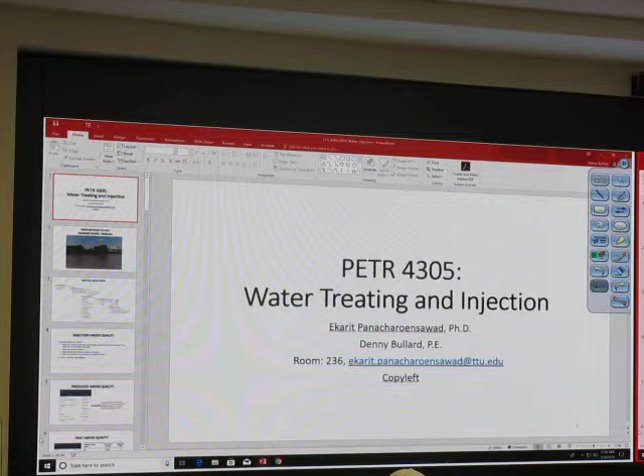Okay, today we want to talk about water. I think people say that if you're in the oil business, really you're in the water business. For a long time in the oil field, all we did was talk about water as a waste stream, how to get rid of it. So more and more today there's social pressure, it's called your license to operate. How we handle that water, how we preserve the water is a big part of our business.

And everybody just takes this for granted that it's there to drink. We're really in competition in the oil field with agriculture, with cities and municipalities for the use of this fresh water. So we want to look at a couple things. One will be how do we reuse it, recycle it, or retreat it for either drilling or fracturing purposes, or what do we have to do to treat it for use in water injection. When we talk about water injection, that will be either disposal or for water flooding.

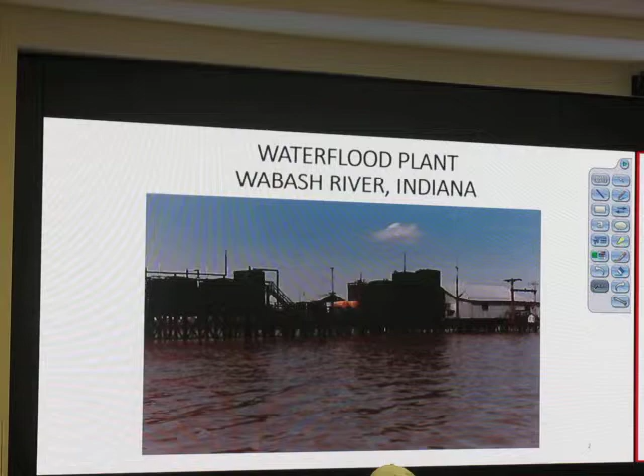So water flooding literally can happen. This is an oil field on the Wabash River in Indiana. Normally you can drive to the wells. In the spring when the floods hit, snow melts, all of the facilities are on 8-foot platforms. To get above, you have to take a boat to get to the facility and to each individual well. Each pump jack is set up 8 feet too. So we're not quite that literal on water flooding.

Really, to think about water, you need to think about the whole life cycle of it. Where do we take it from the water source to a gathering system, to an injection plant, a distribution system, and finally to the wells. We're going to talk some about well work today as part of this facility to handle water.

Water sources have to consider the compatibility of different waters with each other. We also have to look at the volume. Is it sufficient for the needs that we have, or is the volume such that we're going to have to think of other disposal methods.

This may sound kind of silly, but water runs downhill. If you have to place a water central gathering system, you'd like to be able to use gravity as much as you can to help you get it there. Study about pumps - if you don't have to put that pump in, just let gravity take it down to the point where you want it.

Produced water across lease lines is a bigger and bigger issue that we'll have to face. Your lease normally gives you the right to lay water lines anywhere you want on your lease.

Once you get off that lease line, you've got to secure a right of way to take that water any further, or that unit line if the property is unitized. One of the big bills in the legislature right now is the right of eminent domain. A lot of pipeline companies and even producers have used that, say it's for the public good: I can cross over lines and I can do it with governmental aid, I don't have to have the landowner's permission. So that's a very sensitive issue with the landowners that we'll be working with.

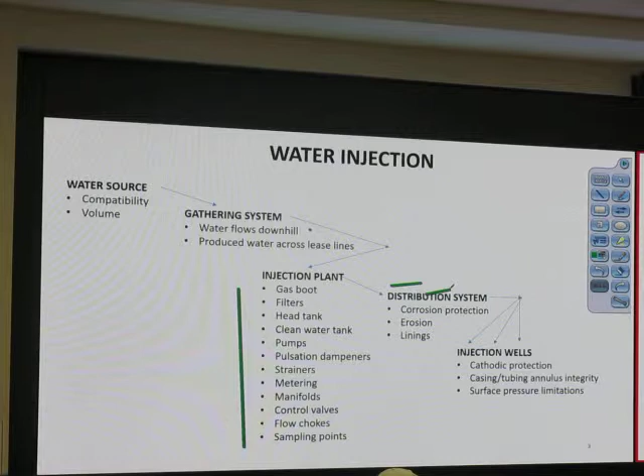But first, for injection water quality, anytime we go in the ground with it, quality injection water can be defined this way. It doesn't contain particles large enough to cause any formation damage or plugging. And those particles can be solids, oil, and gas. Those can be considered damaging particles for a waterflood. Our quality water doesn't cause corrosion. Now, there's not a lot of things we can do to water. We can add chemicals to it. Most especially, though, we can consider the trim, the metallurgy, and the linings and coatings that can go into it to keep corrosion from happening.

The water that we use would be quality if it doesn't create a scale or other precipitate. With mixed waters, that's always a danger, taking it from different sources. We don't want any bacteria that can cause corrosion. Bacteria have a way of lying in low spots on pipelines. So if we don't keep that water moving fast enough and get deposits in there, that's a prime breeding spot for bacteria. Their byproducts are corrosive. And finally, it's got to be affordable. If I can't afford it on a per dollar basis to make money out of the project, it doesn't do me any good.

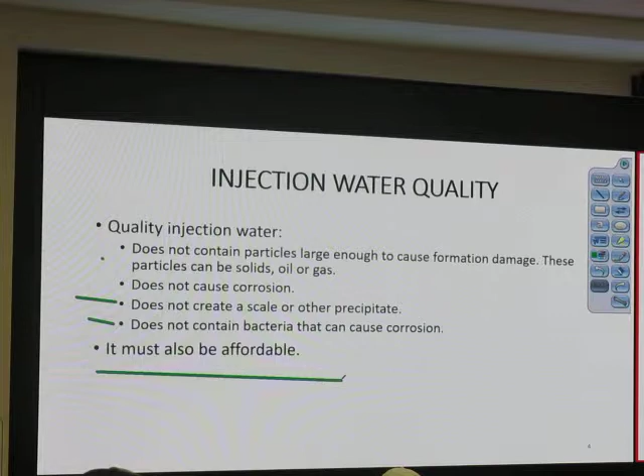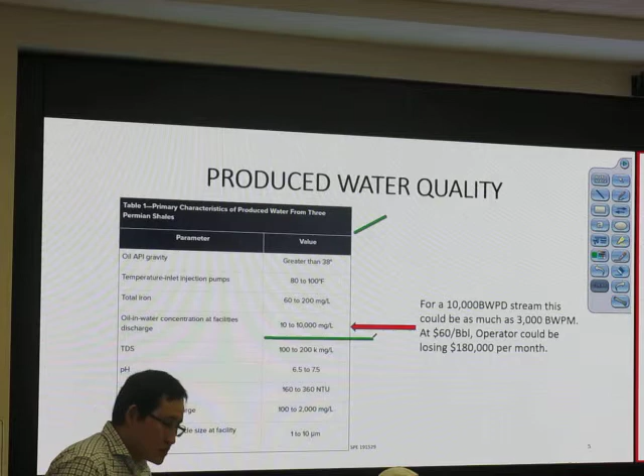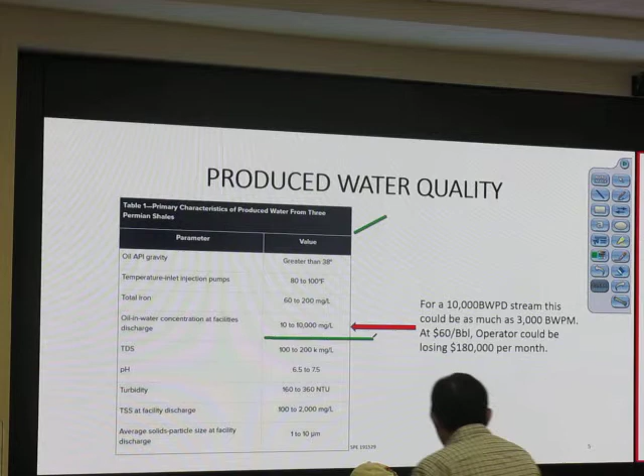This table was taken out of an SPE paper. It's primary characteristics of produced water from 3 Permian shales, and there's some general guidelines there. I want you to look, though, at this one. This is the oil in water concentration in facilities discharge. They built a facility, they're getting rid of the water. Notice it went from 10 to 10,000 milligrams per liter. A quick calculation: for a 10,000 barrels a day water stream, that's as much as 3,000 barrels of oil per month. At $60 a barrel, in a month's time, we'd recover $180,000 of oil that's in the waste stream.

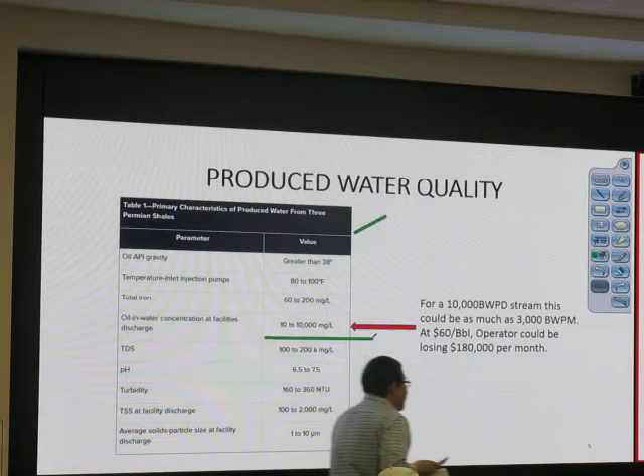Now, if I'm running a saltwater disposal station and you want to deliver 10,000 barrels a day of water to me with 10,000 parts per million oil in it, bring it on. I'm going to charge you $2 to take your water, but I'm really going to make money on that oil I skim. And the Railroad Commission recognizes it. They have a special report that you turn in, skim oil recovered from water stations. So if you don't design the equipment properly, you could be giving away money, disposing of it in the ground. And you can also be damaging your wells.

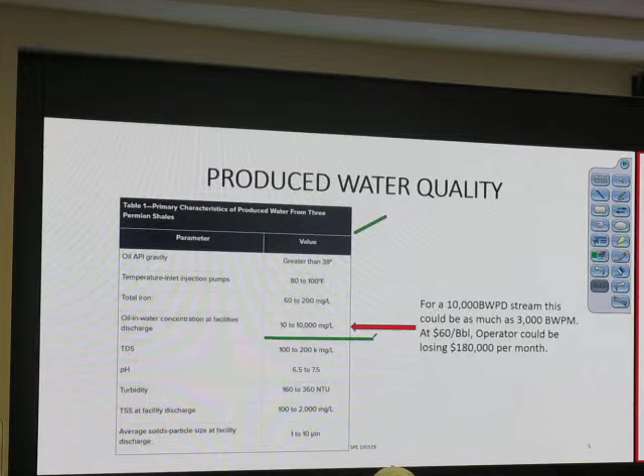Frack water quality. Here's again our Permian typical quality. Notice what the difference is when we go to look at making frack water with a cross-linked gel fluid as compared to slick water. Cross-linked gels have got to have all of these products or electrolytes, whatever you want to call them, in certain concentrations for the gel to work. If it's out of those boundaries, the gel doesn't work.

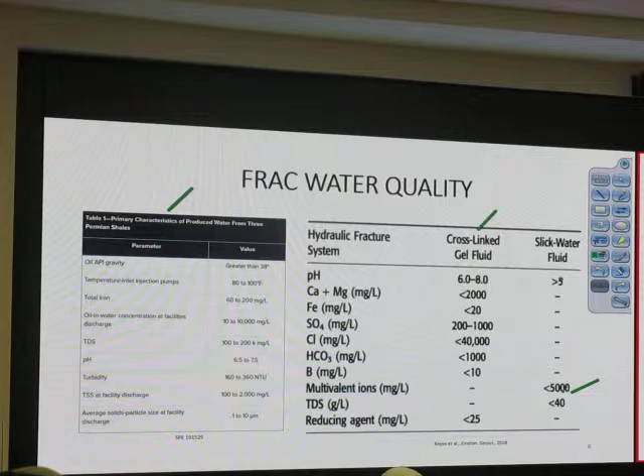So if I'm taking produced water and taking it from this to this quality, I've got a lot of treating to do. Slick water, on the other hand, we just need to make sure our pH is all right. There are basically a lot of chlorides in it, and our TDS is relatively low. Most of the time, we can get that with filtration. And that's what makes slick water such an attractive part of a frack job, the ease that we can take produced water and get it down to a frack water quality. I was going to ask what TDS is. Total dissolved solids, as opposed to suspended solids. Okay?

We're considering multiple water sources nowadays too. This was one major operator's pipeline system that was being laid in the Permian Basin. They're taking, in effect, produced water. They're taking water from brackish sources, shallow sands that are too salty to be considered fresh. Taking water from city effluent plants. And then they're taking water from freshwater, USDW. Everybody know what that is? Anybody know what that is? Underground source of drinking water aquifer. And so it's one of those designated as a freshwater source of supply.

What happens when we mix all those waters together? You stand a chance of forming scale. You can form precipitates other than scale that could be in there. And so all of those different sources of water are being combined together to supply frack water and drilling water for oil field purposes. And we'll talk some more about these systems and how they're put together in a little bit too.

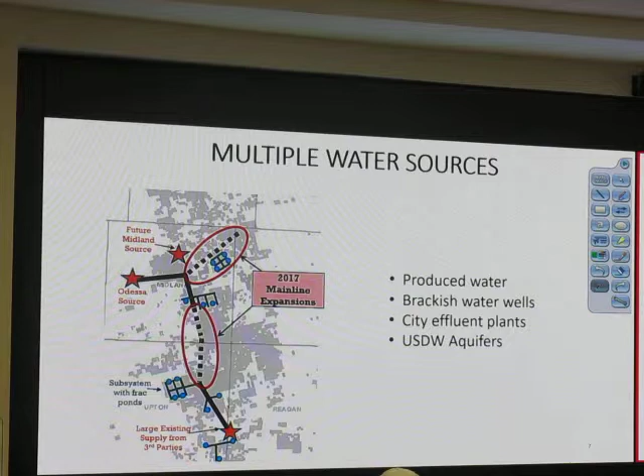Does anybody remember what a Stiff diagram is? Did you cover this in fluids? Never seen it before. Okay. A stiff diagram is an easy way to recognize what your water looks like graphically. What you have in the middle is a dividing line; to the left are positive ions, to the right are the negative ions. So for example, on the right side here we've got chlorides, bicarbonates, sulfates, CO3s. Then on the left we've got sodium, calcium, magnesium, iron. Most of those components will be present in most waters. And so if we look at seawater, this one right up here, and the chlorides are right here, that thing really swings heavy on chlorides.

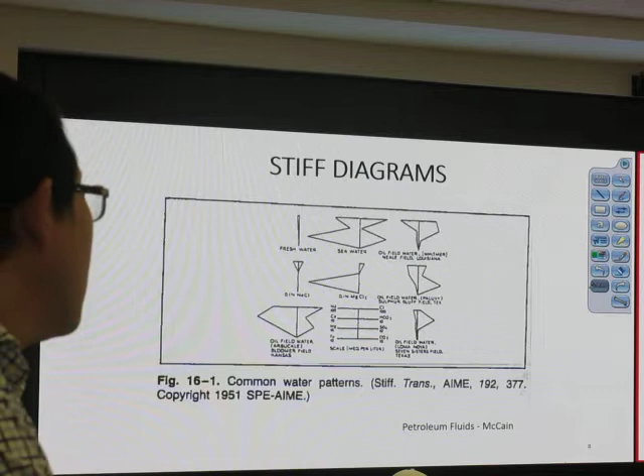And then each produced water has a unique signature. So with these diagrams, you just make a quick plot of the ions that are in it, and if you're looking at a water sample and I say, I wonder if this is coming from a certain reservoir, I can make that signature plot, lay it down and compare it. You know, fresh water would have hardly anything in it there. But the others have unique signatures to them. So if I'm looking at water compatibility, water with the same ion concentrations ought to be compatible, and that's a quick check with some information you can get pretty readily. Also, if you're looking for a casing leak, take a water sample, make a stiff diagram. Does the water look like fresh water, or does it look like my produced water? Gives you a hint where things are when you go to troubleshoot.

Water treating technologies. You get out there, you're going to work for an operator. There are going to be people knocking on your door saying, I can treat your water, and I can take it down to drinking water quality. I can treat it to whatever specification you want. And that's probably true. Remember, every water doesn't have to be cleaned up to drinking water standards. You can spend a lot of money going to drinking water quality for no good reason.

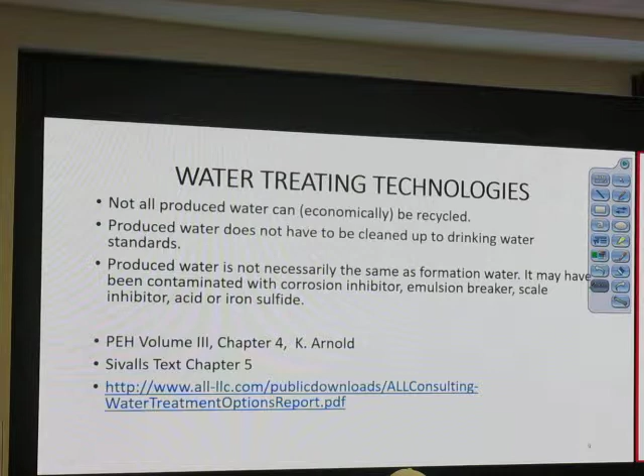And then produced water, you think, well, I don't have to treat it. It's produced water. It's come out of the formation. I'm just going to inject it right back in, right? Well, it's got some contamination too that it's seen with corrosion inhibitor, emulsion breaker, scale inhibitor. You could have had iron sulfides form. All of those things need to be taken out before we put it back in. Or at least we take out enough based on tests that we're not doing anything harmful to the formation when we re-inject produced water. So just because it came out of there doesn't mean it can go back without any treatment.

There's 15 or 20 different technologies out there that different people are attempting to use to treat produced water. The chemical engineering department has got a test going on using membranes, pressure-driven membranes. When we go on the field trip to Oxy, we're going to see membranes where they're separating CO2 from natural gas. And this principle applies to produced water to take out different elements, just like the gases can be separated on a membrane.

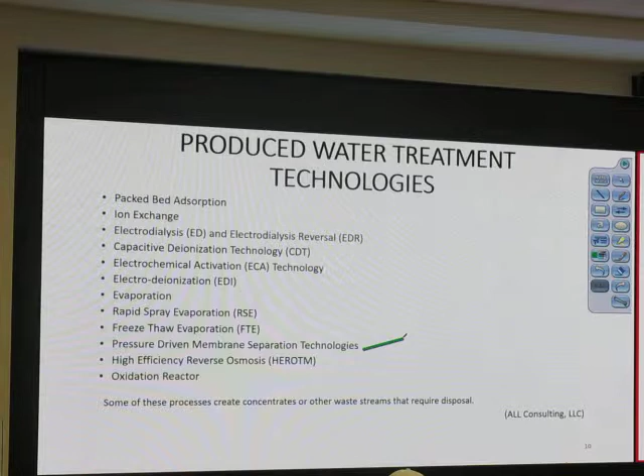The names are 18 syllables long, the different things that people will try and do. So just remember that some of them really work, some of them are really expensive. You don't need to familiarize yourself with every one of them, but ask some deep questions about what does this technology do, what's it going to cost, what's the drawbacks and limitations to it.

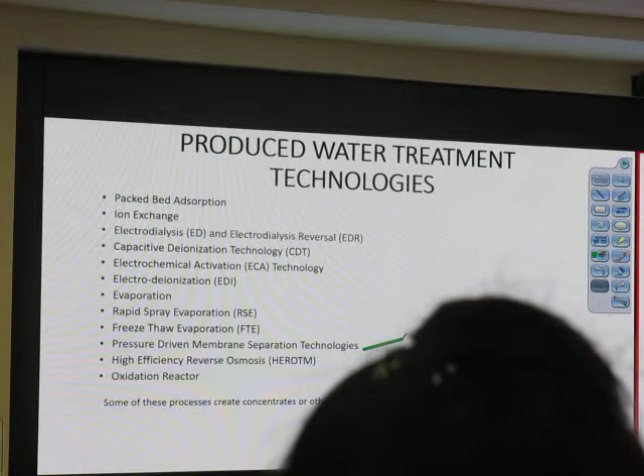System design pressure. How do we know what pressure we're going to need when we go to inject water? What's the maximum pressure? Fracture pressure? Why do you say that? Do what? Oh, yeah, a step rate test will tell you what that pressure is. Do we want to be able to fracture the reservoir? So we say that as a good reservoir engineer, I don't want to fracture the reservoir, right?

How about south of Laredo? It was a freak cold winter in about 1983, and the lines were all laid on the surface. Nothing was insulated. We'd just been testing some new pipe that just popped together. It didn't have screwed threads; it was literally one joint forced in the next one. And when this cold weather hit and stayed for a few days, the ice expanded and the pipe contracted, and we had 30-foot joints laying all over the pastures. Big water leaks, but we designed on the average South Texas conditions. So averages can get you in trouble.

And I guess it's not nice to talk about Aggies, but they talk about the Aggie down at College Station that had one foot in the bucket of ice water and the other foot in the bucket of boiling water. On average, he was comfortable.

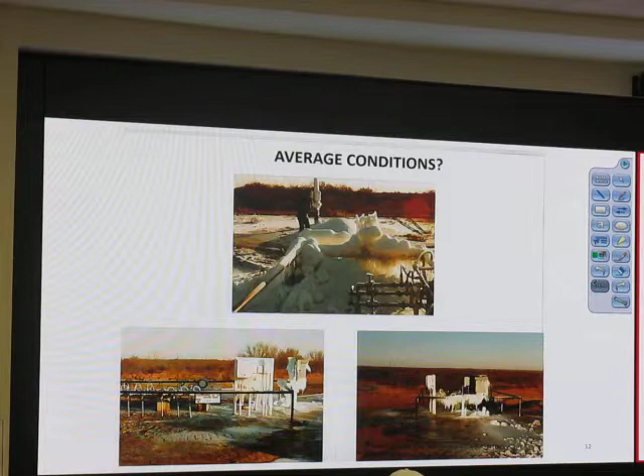So we need to know what we're designing for. What kind of conditions might we expect? System design pressure. Here's an example of things we work through. If we have a well at 5,000 feet, we know the fracture gradient, we know the specific gravity of the injection water, it's a little heavier than fresh. And then we've got to make a starting point on what I want to get to the wellhead with, and we can assume 10% of our average pump discharge pressure will be taken up with friction pressure.

You guys are learning all sorts of ways to calculate pressure drop in the line, single phase. Dealing with water is nice. So what's our pump discharge pressure? First, we've got to calculate the parting pressure. That's just the frac gradient times the depth. We get the benefit of the hydrostatic head, which is just the gravity of the water times the depth times the gradient. Then if we subtract that hydrostatic help and give ourselves a 10% safety factor for this particular condition, all we have to have for pump discharge is 1,045 psi.

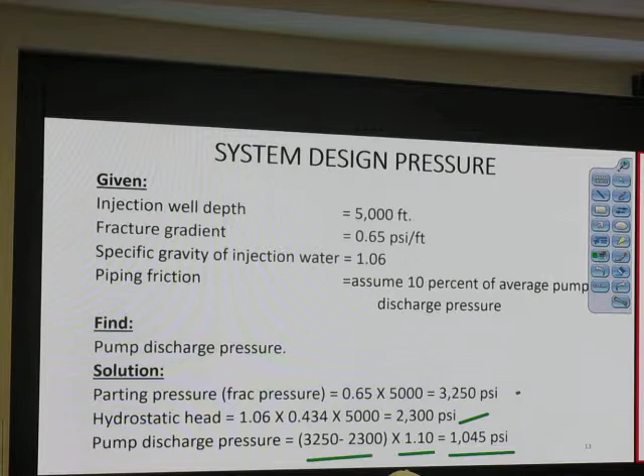And we can get to our wellhead with pressure great enough to fracture the formation. Then we go back and refine this as you design your piping, put those numbers in there and see what you've got to do to really get there. An injection station design is pretty much the same if we're doing a water flood station or a disposal station.

This would be a typical water flood station layout. We're going to bring our produced fluids from our tank battery, produced water, through a gas boot. Even though it's water, there will still be some gas entrained in the water generally. Coming into our gas boot, we go into a large produced water tank. And then from the produced water tank, we're going to skim out of it and go to a skim tank for oil.

The skim tank can be pumped back to our heater treater. We can resell it. Remember, this is where we're trying to get water down to a quality where we're not giving it away, or we're not plugging a formation. Go out of the produced water tank to a pump. Almost always in a water flood installation, you'll see filters. Filtering removes most of the solids out of the produced streams that will need to go into injection wells. And it's always a good idea to have two of those because filters will plug.

Anybody ever had a swimming pool system they worked on that had filters? What do you have to do to it to keep it working? You have to backwash it. And so if I have the piping such that I can isolate one, backwash the other one, I can stay in business 100% of the time while I'm cycling back and forth between backwash and filtration needs.

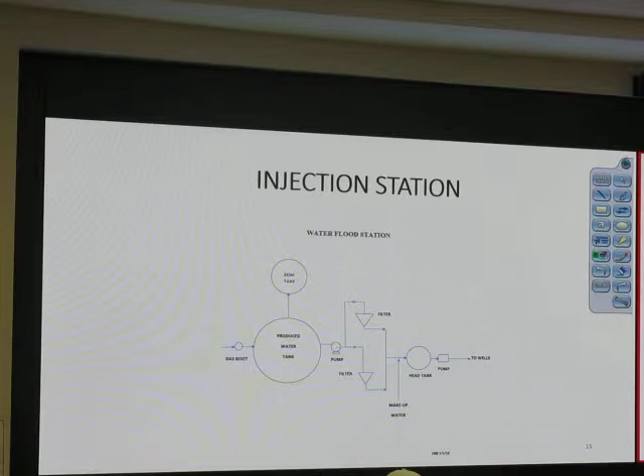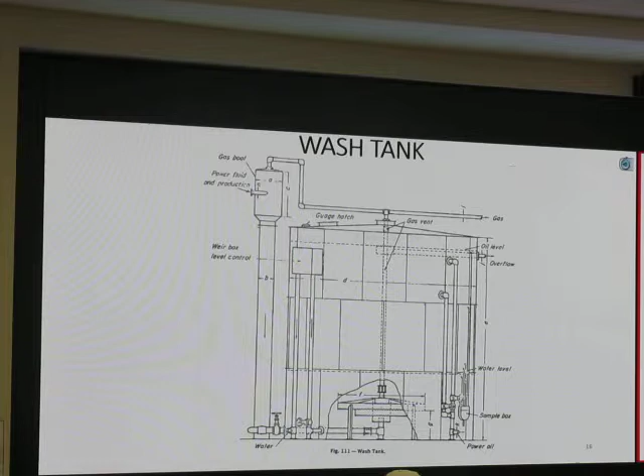This is a wash tank, which is pretty close to a gun barrel. The only difference, this one is taken from a design for cleaning power oil systems. Remember when we talked about artificial lift and subsurface hydraulic systems? This is the same tank design that would make a very effective water treating tank. Bringing the produced fluid in to a gas boot. This has about a 0.5 foot per second velocity through it. Lets the gas separate, go to the line.

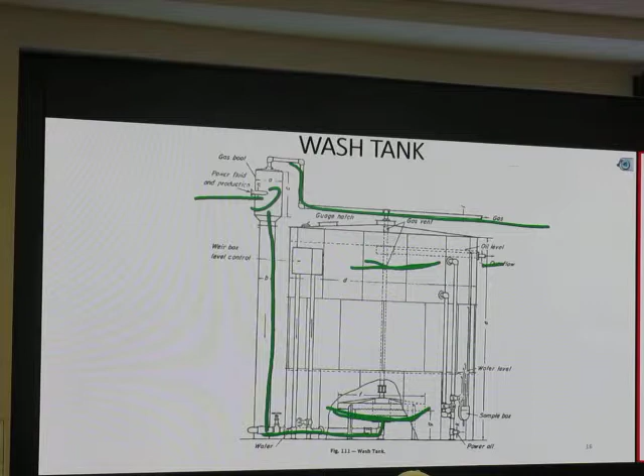Water that's dead now goes in the bottom of the tank and comes up and goes under these spreaders. That distributes the water volume out through the full diameter of the tank. And as this rises, there'd be another skimmer on top of here to take this overflow, and that would be our oil going out to our skim tank. Cone bottom tanks really ought to be considered for those produced water tanks. You're going to be seeing more solids come in there, and that makes for a lot easier cleaning.

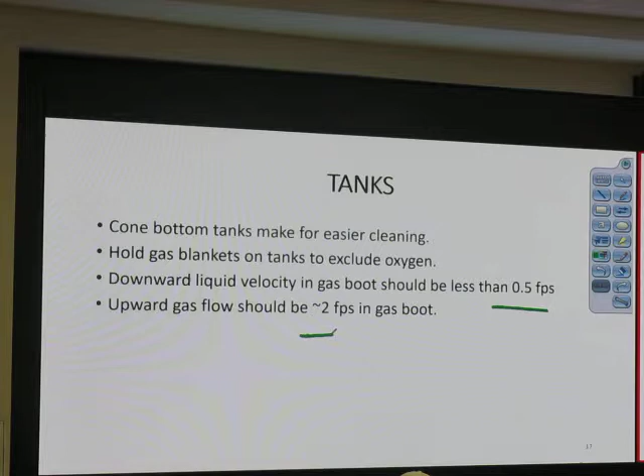Tanks need to have a gas blanket on them for oxygen control. This 0.5 feet per second is a rule of thumb. Engineers can get in trouble using rules of thumb. They can also, they'll get you in the ballpark for design. And then you can do further refining with a lot of the techniques that you're learning in here. And then we want that upward gas flow to be about 2 feet per second. Higher than that, we're going to start carrying some water.

Media filters are the most common type in the oil field, and that's just a sand filter. It may have some carbon in it. So that can include sand and gravel or graphite. You're going to have to usually pump through those filters. The head tank won't be sufficient to get it all the way through. You're going to have to pump through the filter, and you're going to have that same pump. You can turn it around and backwash with it.

Sivalls has some design literature that's in your text that you've already been given. And they use a nominal design rate of about 2.5 gallons a minute per square foot of filter area. You wind up with some very large filters on big water flood stations. And to that point, you might be surprised, but not all engineers think alike.

The classic example I saw of this was a large company was selling some properties. The company I worked for was going out to buy them. We were doing our due diligence on the ground, going and looking at all the equipment.

We found a large building. The company took us in there, and it was a brand new filter. That thing was probably 12 feet in diameter, stood about 15 foot tall. It had all the piping up to it. It was brand new, had never been used.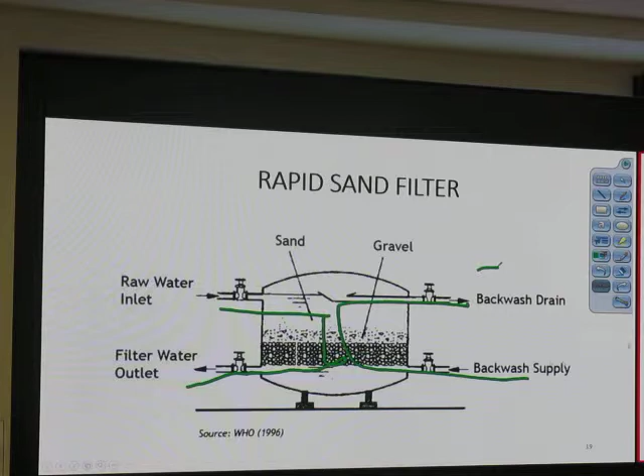This is from the civils literature on sizing. A quick sizing on that will give you an approximate idea of how much capacity you need.

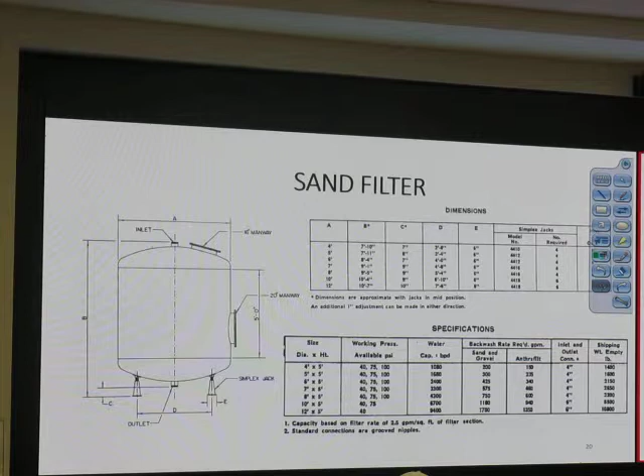Injection pumps: pumps can be positive displacement or centrifugal. We had a couple of lectures on that. Remember, the two big things to consider when we buy a pump are our capital cost and our operating expense. Which one of these types of pumps, PD or centrifugal, for the same water volume would cost the most to operate?

Everybody thinks a PD pump would be the most economical. Most economical, or which one costs the most to operate? Is there a difference? You said which one is most economical and which one costs the most. I'm asking you, is there a difference? Yes. Okay, why is that? The one that costs the most to operate is the least economical. Okay, good point.

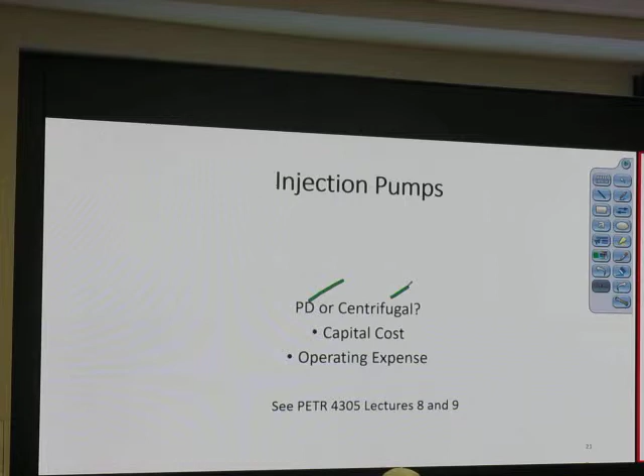The cost will be different between the two types of pumps. On operation, which one's more efficient, PD or centrifugal? PD. So if we have a PD pump like these, how many potential leak points are on a PD pump? This is a big quintuplex, used on frac trucks. This is a triplex, 3 plungers instead of 5. How many leak points are there? A lot, right? How many leak points are on a centrifugal pump?

Probably where the inlet and outlet piping connect. How many parts do you have to replace on a PD pump compared to a centrifugal? These are made for easy access. Notice all the bolt caps on top of the cylinders here to get to the suction and discharge valves. The plungers will take wear and tear. We've got a lubricated crankcase back here that has bearings in it that have to be maintained.

A centrifugal has some of those same bearings and considerations in it, but a PD pump is generally used a lot more than centrifugals in the water floods, especially in West Texas, because of the pressure requirement. Lower pressure, high volume lends itself to a centrifugal pump. The higher we go up on the pressure, the PD becomes the pump of choice.

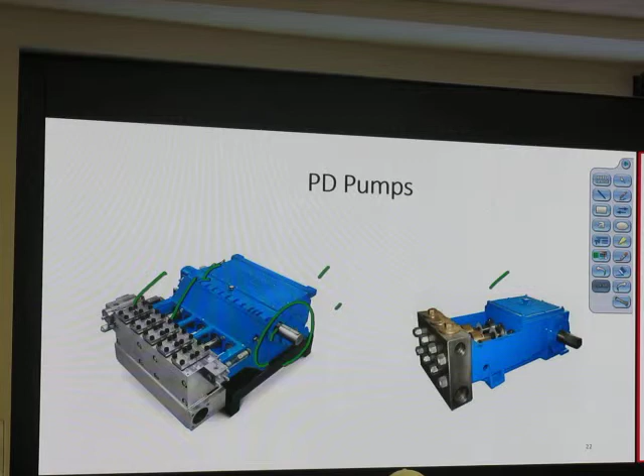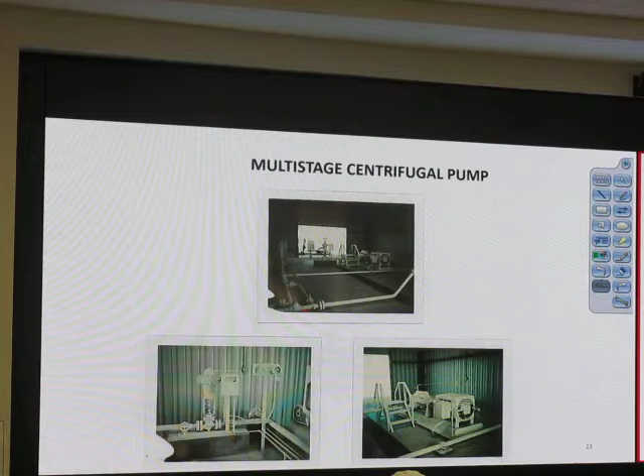This is the motor sitting back here with the pump. Coming into the pump is a suction line from the tank that sits just outside the building, goes into the pump. From the pump, back to this picture, it goes through a startup valve. That startup valve, when the pump starts, is closed.

Why do we want to do that? Back pressure on the pump. And why does it start up there? That's what he said. Where'd he go? Why do we start against the closed valve?

Look back at a pump curve on a centrifugal pump. If there's no back pressure, where does the horsepower go? It goes up, it's just infinite. So if we started against a closed valve, we don't overrange our motor.

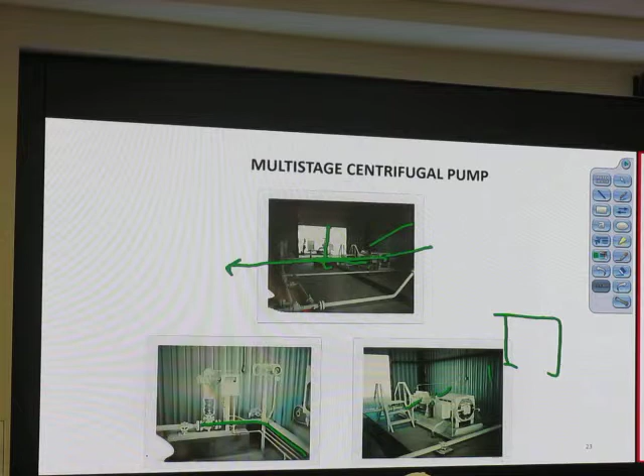We could start up against a closed valve. As pressure builds up, this valve starts to open and release pressure to the system. So then our water can go out to our headers for injection, or in this case, we've got a bypass where we can recirculate water back to the tank, helping adjust our total volume coming out of our station. Schematically, it looks something like this.

We come out of the pump into that first control valve that's going to hold the back pressure. And then once it opens, we go on out to our headers, and then we've got this recycle line that takes it back to the tank.

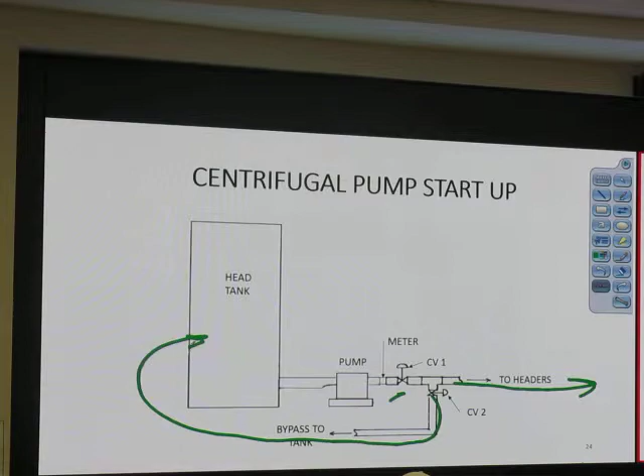PD pumps take big bases under them to be really vibration free. Most of the vibration problems we see in pumps are due to poor suction conditions. It's got to be big piping, short piping runs, slow velocity to get into that pump. The metallurgy has to be selected to be corrosion resistant, and aluminum bronze is a real common oil field solution for these corrosion conditions.

So when we're selecting the pump, we're taking that total capital cost plus operating expense over the life.

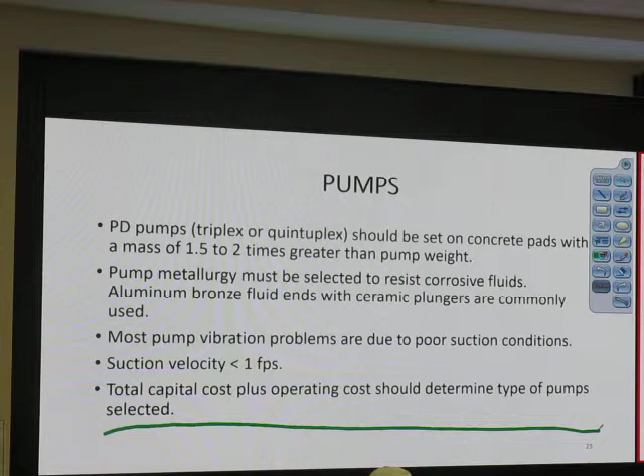Distribution lines. How long can a distribution line be? As long as you want to pay for the horsepower here, you can get any volume and pressure you want out to any header and to any given well. So sizing these lines, and I get this question a lot about senior design, is how long can they be? What's reasonable for a line?

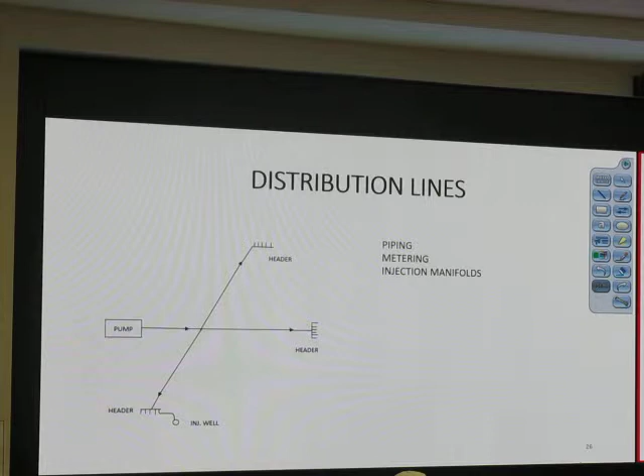So it's a matter of what you get as an economic solution, right? I pay for horsepower here, I pay for pipe size here to help reduce horsepower. And so if I can reduce horsepower enough, I'm putting in large lines. Generally though, we're staying with line pipes that are easier to handle, smaller diameters.

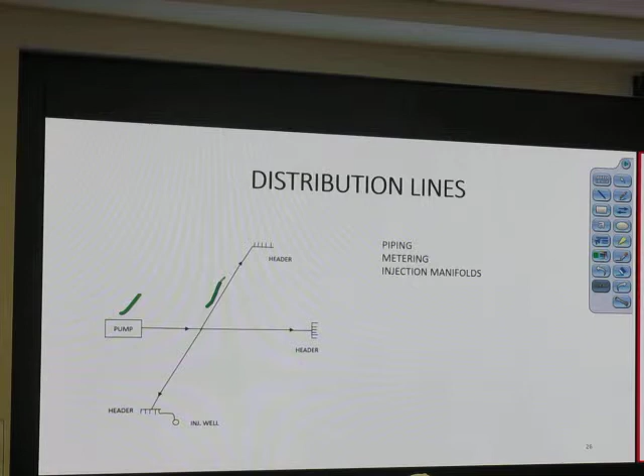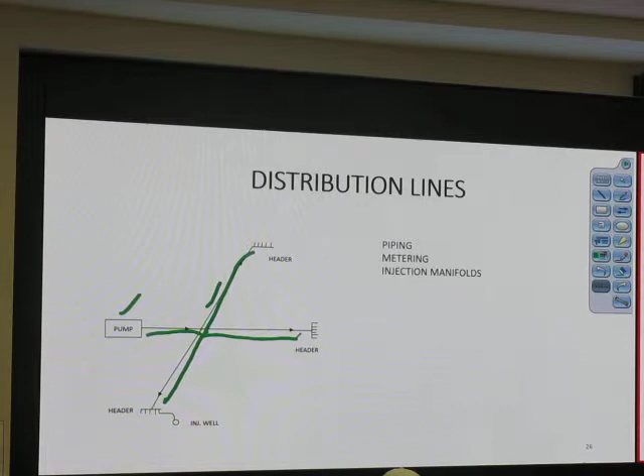We may have to have multiple pumping stations, central plants, to satisfy a large water flow project. But it's very common to come out of the pump, go to header lines that feed smaller laterals, and from the laterals you're going to single injection well points beyond that. The more places you split up the water, the more you got to be concerned about metering.

The metering in those volumes, we've got to take our total station discharge, how much we're putting out of the station, how much goes to each header, we need to meter that, and then we need to meter individual well volumes. Why is it necessary to meter the individual well volume? And why is that important?

You want to make sure one well's not taking all your water. Yeah, in water flooding, you want balance on where we're putting that water in. If a single well is taking large volumes of water, we could be flooding out, we could be going through a thief zone. So that's why it's important to have that individual well water volume.

Purchase volumes have to be metered. Produced water volumes in total need to be metered compared to what we're disposing. And then any makeup water that comes in there from whatever source.

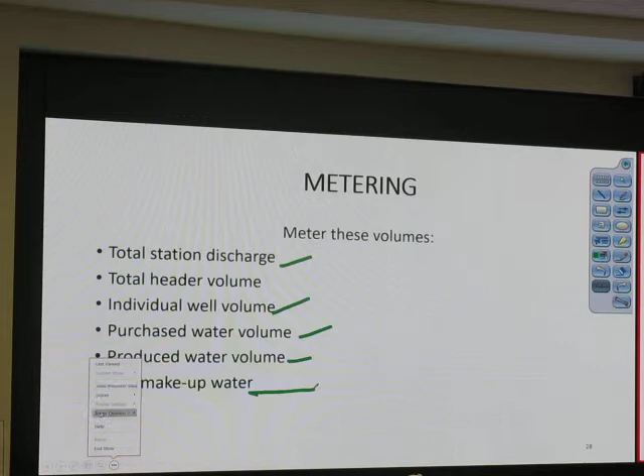We skipped one slide, let's back up a minute. On the injection lines, buried steel lines need to be insulated or wrapped. Anytime we put that bare steel in the ground, it stands a chance for corrosion, especially through caliche. So we go through caliche pad areas, across caliche roads, under caliche roads. That's a particular corrosion problem.

Fiberglass pipe is used a lot in these water lines, this GRP, glass reinforced pipe. It has to have a sand pad around the fiberglass. If you just throw the backfill of the ditch right back on top of it, rocks, trucks drive over it, you punch holes in the fiberglass.

Fiberglass pipe, if it's left on the surface, and it's used pretty commonly in water stations, has to be painted. And that's because the UV light from the sun will deteriorate the resins that hold the fibers together, and that pipe will literally peel apart.

And then we want to keep a minimum velocity going through those lines to keep them clean, keep things moving. If we have solids, we want to do our best to get them out of the system, but if we can't, let's keep them moving. Don't let them stagnate.

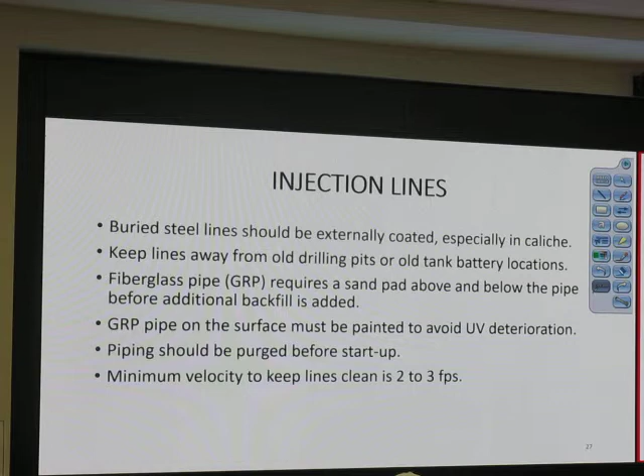Metering we talked about. Every meter ought to have a strainer upstream of it. We don't want liquid to go below the last separation pressure. What does that mean when we meter?